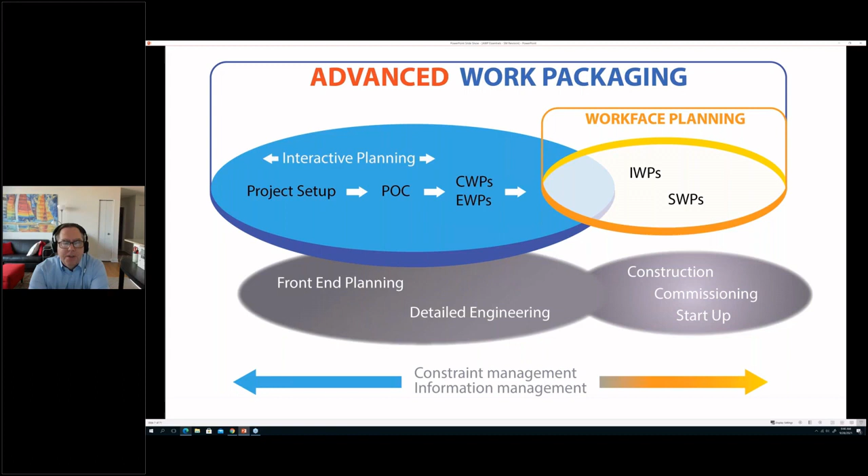Now, across all of this, we focus on having good information management so that information is shared across all the players. And we have good constraint management to make sure that we're resolving constraints before they become a problem and impede progress in the field. So if you're coming from lean and you're familiar with the last planner concept or constraint management, that is fully embraced in the AWP principles, although we don't always use the same words to describe it as lean does.

So with that, that's a very high level overview of what AWP is about. It's not about reinventing how we do projects per se, but it is about putting in place a structure to cement good practices with innovations around work packages as the primary deliverables, which is an innovation in how the normal project accomplishes work. So with that, let me turn that over to my colleagues and have them talk about what AWP means to them.

So Jamie Gerbrecht. Bill, let's go back to the previous page just for a minute, one more, just to that introductory page. Sure.

So, for me, as Dr. O'Brien has shared in the past, to have AWP is to have a wellness program for projects. I can recall about 6 years ago when I first visited a particular project site where the workface planning portion of AWP was being well applied. And what was so impressive was not just how well things were going in terms of safety, productivity, cost, schedule, predictability, and quality, but also how positive and energetic the site atmosphere was for this team.

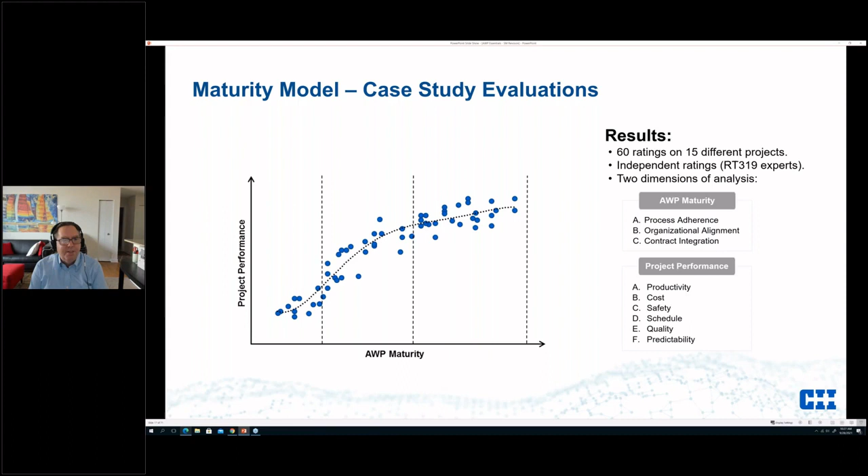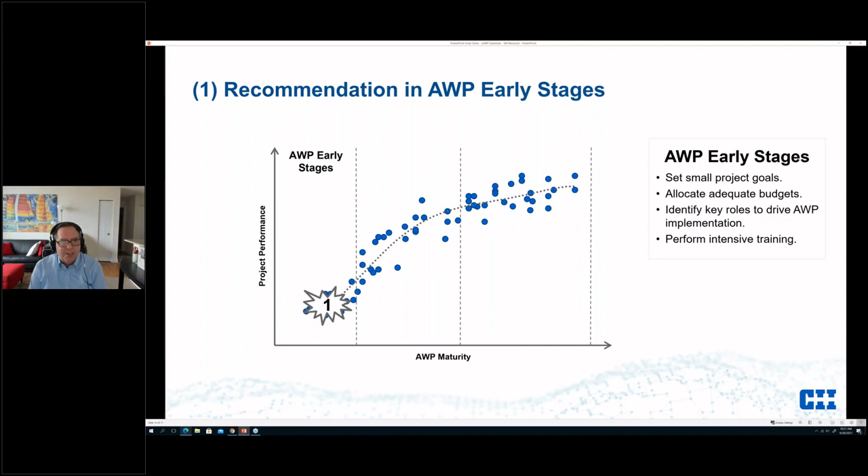So what do we see when you're getting started? Oftentimes you're not doing full AWP, you're doing just workface planning. You're getting initial champions to learn and get started, and you're seeing maybe a 10% improvement in productivity. We can see that here of around 10% in productivity, projects coming in on budget, safety is improved, schedule, predictability, and quality, little small improvements.

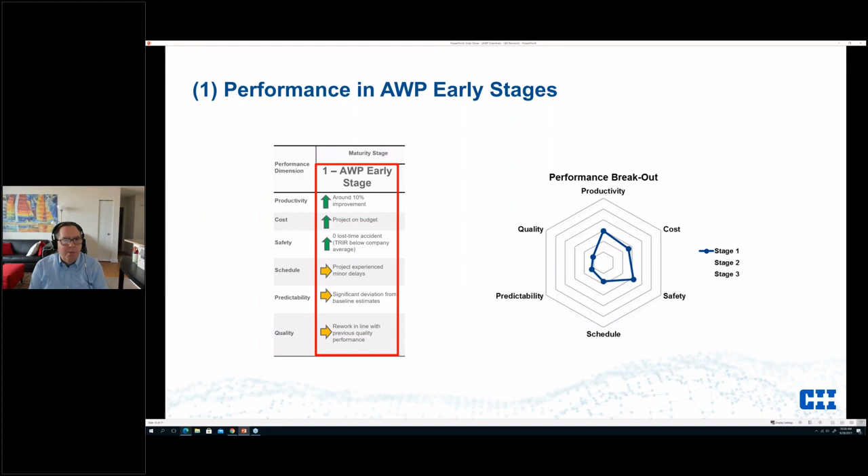Now, what happens when people get past their first implementation and they do a workface planning, which is let's just improve construction, they quickly realize there's only so much they can do because the supply chains are a mess. Engineering is not delivered in a timely manner for procurements to happen timely, and so on. And so when they move from workface planning to full AWP, that's where you get to be highly effective. This is where you're getting early engagement and stakeholder alignment early. This is where you get the big wins.

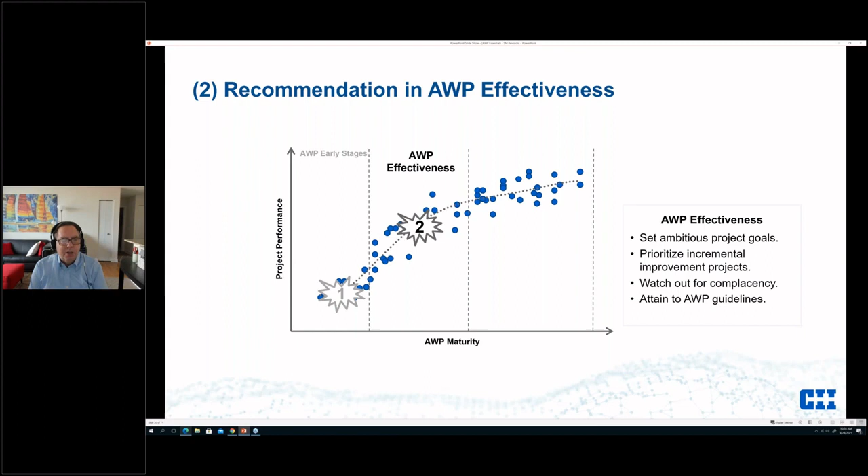And you're getting about 25% improvement over base. That's bringing in the total installed cost about 10% below estimates. Safety and schedule get up, and then predictability and quality also improve. And we've seen this repeated from projects that have contributed since this data was established a few years ago. And basically, once you bring in the front end planning well and get everybody aligned, that's when you see the big wins.

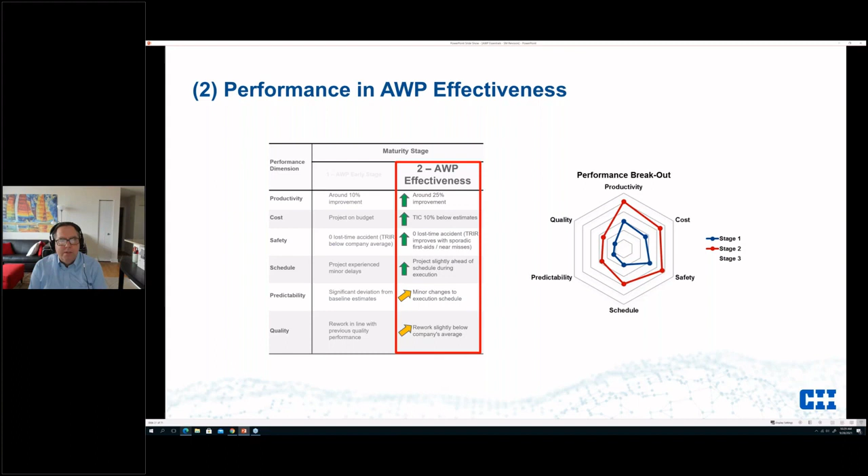And then when that becomes mature, you really cement the gains. You don't have tremendous improvements, but you do see some better predictability and better quality as kind of the big jumps at this point. And you're maintaining the benefits elsewhere in terms of safety, productivity, cost, and schedule.

So this has been repeated multiple times now across projects. We've seen productivity improvements about 25%, and that appears to be very achievable when you do a workface planning implementation on site, which you could say is very much equivalent to a Last Planner type of constraint management, and you align the front end with the back end with full AWP.

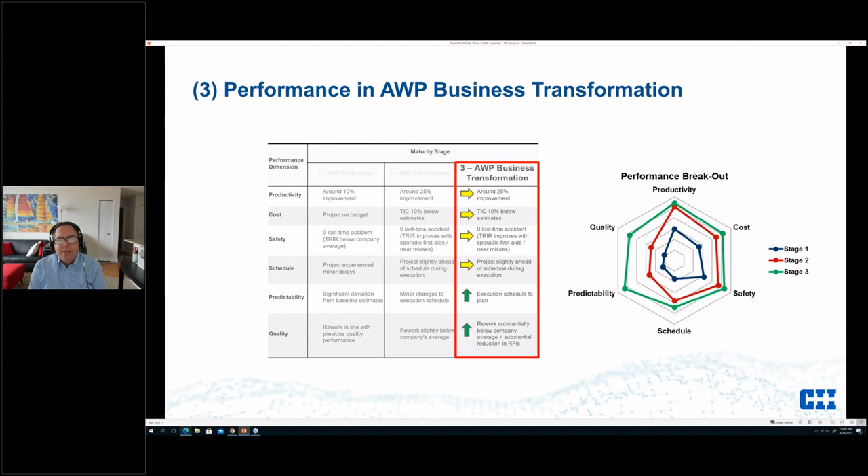And so this is the level we get to, and sometimes we'll see people saying, I want all the benefits in my first implementation. Well, that may not be achievable, but we do think early implementations do have some significant benefit, and as you get better at it, you cement and mature and keep those benefits across all your projects. And so what we see is a lot of organizations now are trying to make AWP their baseline for every project. It's not just the one-offs. As they get maturity, well, we want every project to be this way, and it becomes the way of working.

So how does AWP work? Let me click through this pretty quickly, and then Bob, we can assess if that makes sense for a break.

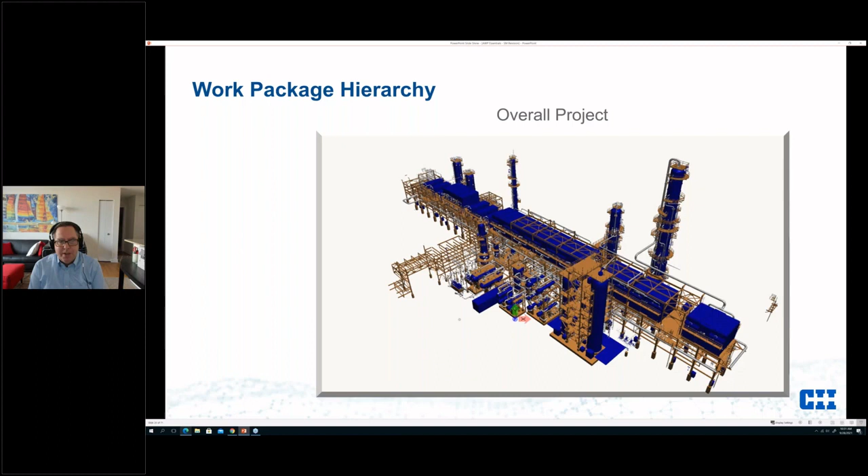You have an overall project. You're going to break that into large chunks of work called construction work areas. It could be units, it could be areas. This is an optional construct. On a big plant or a big project, you might want construction work areas, and on a smaller one, you might not need it.

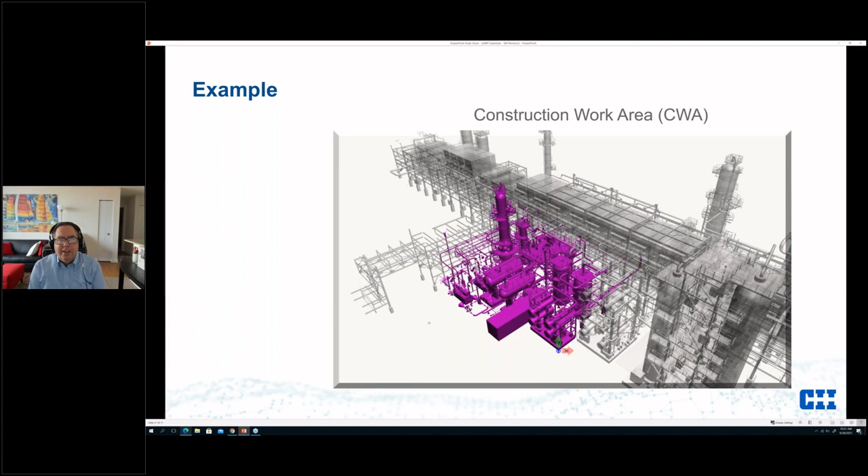But the construction work area is an area, and that is broken then into CWPs and EWPs, and then we have templates for them in our documentation. The key thing here is not the template, but the CWP and EWP are the official ways we think about breaking a project into its pieces and how we transfer information. And that is area and discipline based.

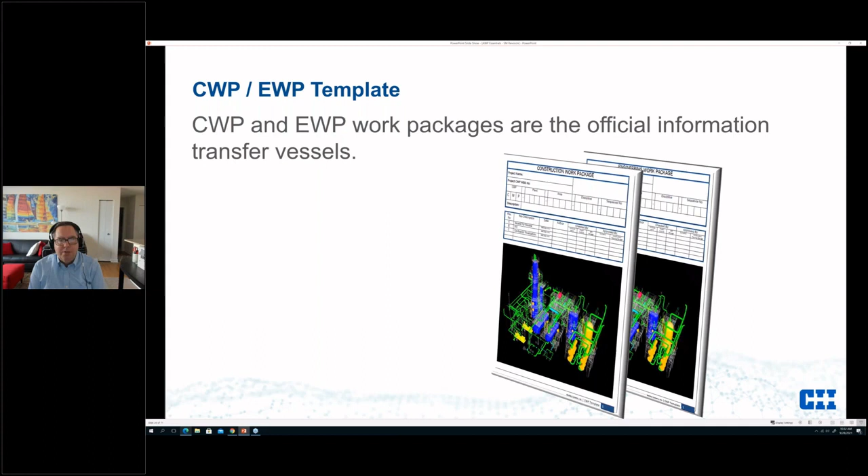And so that's different than saying, here's a complete set of plans for the structure. It's no, this is the complete set of plans for this construction work package in this area and per discipline, which is composed of one or more EWPs. So here is a construction work package within that larger CWA. It's still a big body of work. It's some complex piping, and in this case, it's a piping discipline only. So CWPs are per discipline.

You would have a structural discipline. You'd have foundations discipline CWPs, all within the CWA. Notice the tie-in point called out there. That may not be a functional valve in the final plant, but we're adding something there to allow the CWP to be complete and tested amongst its constituent parts during construction.

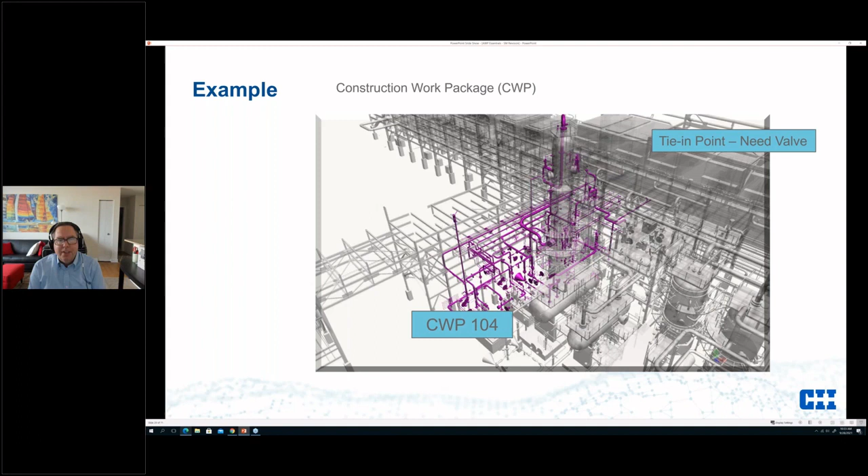So engineering work packages are aligned with the physical boundaries of a CWP, and here in this case we're showing the CWP is broken into two EWPs. John Fish mentioned that in his work it's often one-to-one. Many people will do that for execution, but it doesn't necessarily need to be that way. The hierarchy is one CWP contains one or more EWPs. And that alignment first has to be within the boundaries.

And the reason we want to make sure those EWPs sit within the boundary of a CWP is because we have a plan of how we're going to procure and build this CWP in the field. And we want to get the complete set of EWP information, which would include all the pipes and the sizing and the valves, but also the hangers and all the detail work that would come later. Typically, we want to get that done and make sure it's delivered in a timely manner.

So what does that mean? Well, the process engineer for this pipe is still designing by system. So they're going to do the complete system design for the pipe. But when they think about prioritizing the detailing, they're going to deliver that by area or within the CWP. So that will change some of the detail work that the engineer does and the sequence for that.

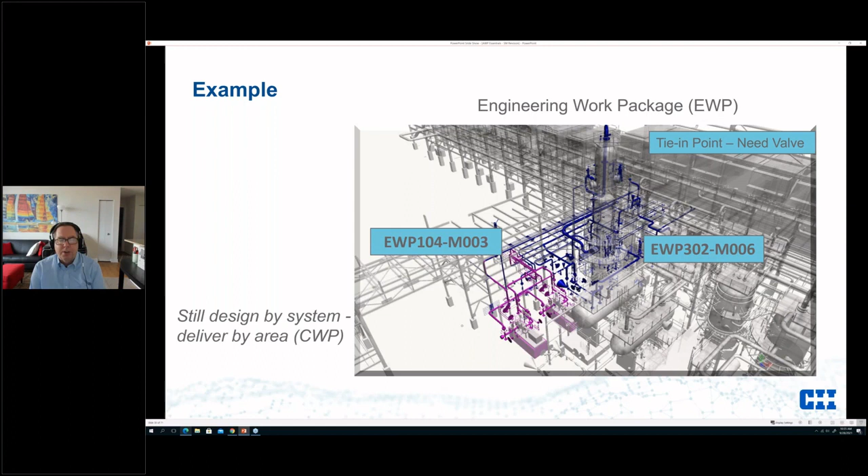So once we have the CWP informationally complete in terms of its engineering work packages, all the design is complete, and we've gone out and procured it, we can break things into an installation work package. And that's this IWP here, which is roughly a week's worth of work for a crew. Rules of thumb, 500 to 1,000 hours. It's really what makes sense.

It needs to be something discrete and manageable that you can process constraints on, make sure all the parts are available, all the equipment's available, safety checks have been done, etc. And then you do your installation work pack to put this together. The crew and the foreman still have great choice within this IWP of how they're going to assemble within that. So we're not removing all responsibility from the foreman.

But what we are doing is having a workface planner that helps assemble these IWPs. And best practice is to keep the IWP definition virtual for as long as you can and only release physical paper to the field as late as possible so that you can move things around within IWPs within the CWP. If a valve is missing, we'll move that out to another IWP, but make sure that you're releasing a logical sequence of work to the field for the crew to be productive in the field for this time.

So there was a question, I saw it popped up previously, about what about test packages? Well, you could also have an IWP for a test pack. What you do want to do is once you're finished a set of IWPs and it's logically correct and complete, and you've done the hydro testing on the EWP, in this case for piping, or whatever other limited commissioning, at some point you're going to move to an SWP, which is a system work package, when you look at energization and other aspects of commissioning to final turnover to the building.

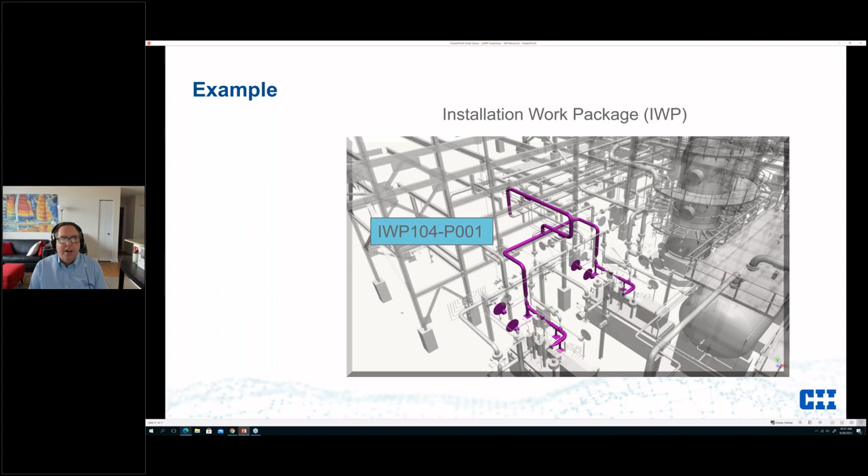So some people will use the term test work packs. Many will use that as an addition to IWP. That was one of the questions I saw there. All right, so how does this work for a non-process plant? Well, a couple of years ago, a team said, okay, how might this work for a location where there was a venue, commercial Jersey City Shores on the Hudson? There was a meeting there. So let's talk about how we break this into an AWP approach.

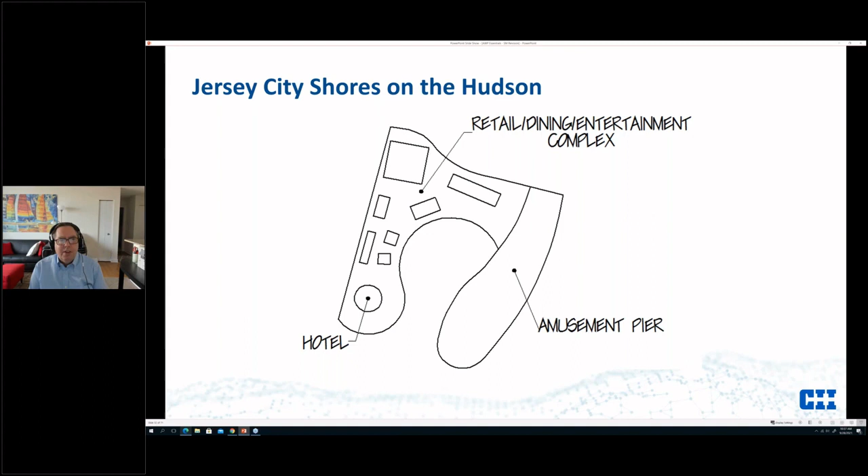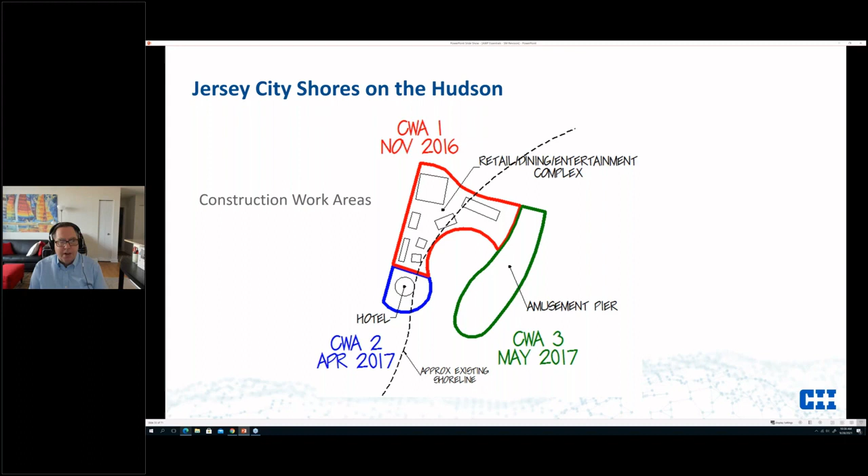So here's this retail complex, there's an amusement pier, there's a hotel. Let's break it into some construction work areas, to be completed in 2016 through 2017. Do the retail dining complex first, the hotel to follow, and the pier to follow that. Okay, so these are the CWAs. Now within a CWA, you will have multiple construction work packages for each discipline. You might have one for underground piling, that's the full CWA. You might break your foundations into smaller chunks within the CWA, in this case 4, and you'll have framing, 4 CWPs just for building framing within the CWA.

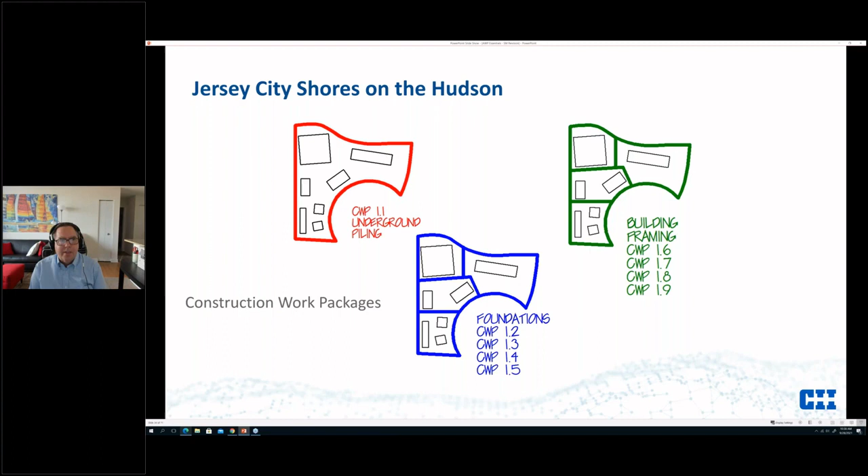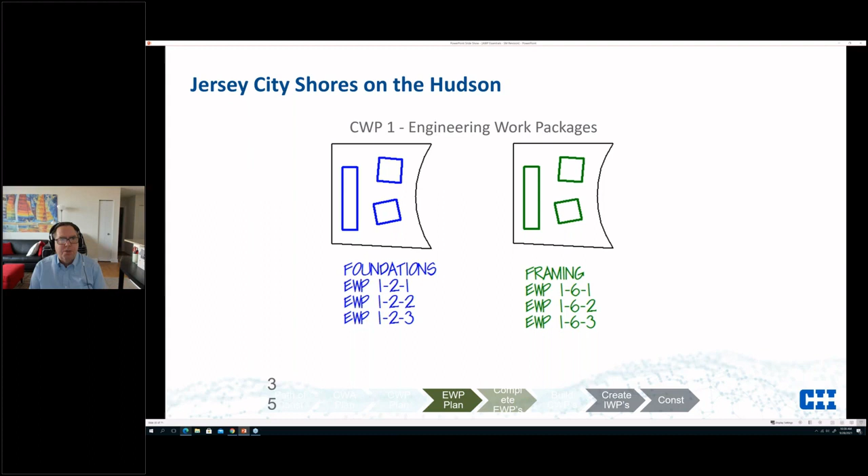Each CWP can have one or more work packages. So for foundations, you might have 3 EWPs that talk about foundations for CWP1, similarly for framing. And then to think about how this all comes together, you can have some CWPs and EWPs within those CWPs. The key thought there is you're keeping things together per discipline, so that also directly supports procurement.

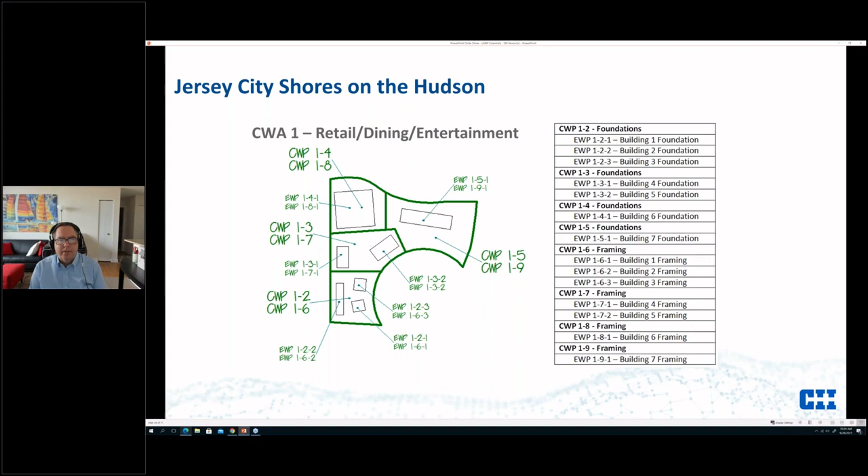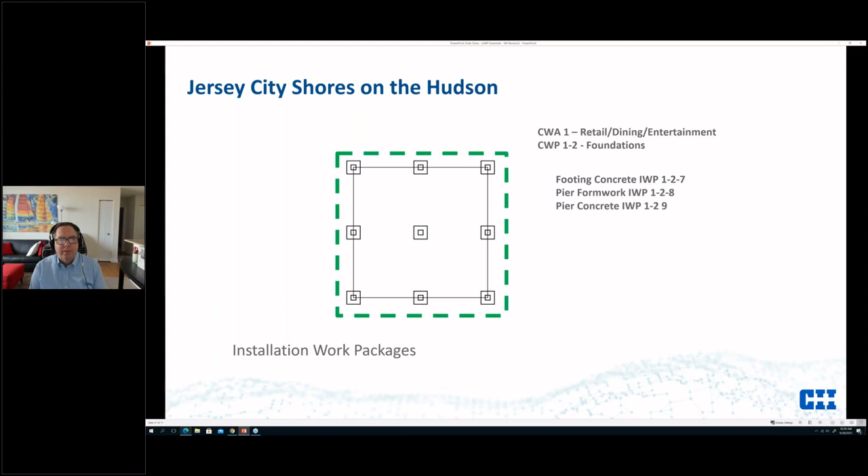And then finally, once all the design is complete and you're ready to release to the field, you can have a series of IWPs. You might have a couple for footing and formwork. You might have some for reinforcement. You may have another one for the concrete and formwork, and so on. And then they would all come together in alignment like this, where you have a set of CWPs. A CWP can contain one or more EWPs as makes sense. And then once the CWP is informationally complete with design information, that CWP is broken out into multiple IWPs releasing work into the field.

Rule of thumb in industrial projects, about a week's worth of work for the crew, but use your judgment. The key thing, it needs to be small enough to be trackable and constraint managed against materials and their availability, and resources, but not too small to get into hourly planning. That would be a different thing entirely. Occasionally you might need a project that gets down to that level, but that would be very specific.

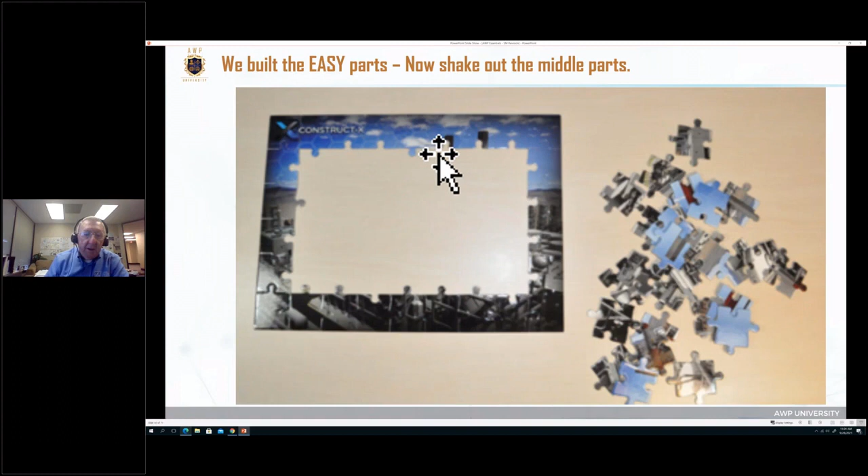So now we got the border pretty well done. Now we got the middle, and this is where life gets difficult. And by the way, I've got a Cutty Sark ship model, and I'm still struggling with these middle pieces. It's very, very difficult. But anyway, this is the hard part right here. You're going to build pretty much what's available. So there's a lot of rework. There's a lot of guessing here, trial and error, see what fits, what doesn't fit. I'm missing this, I'm missing that, and so forth.

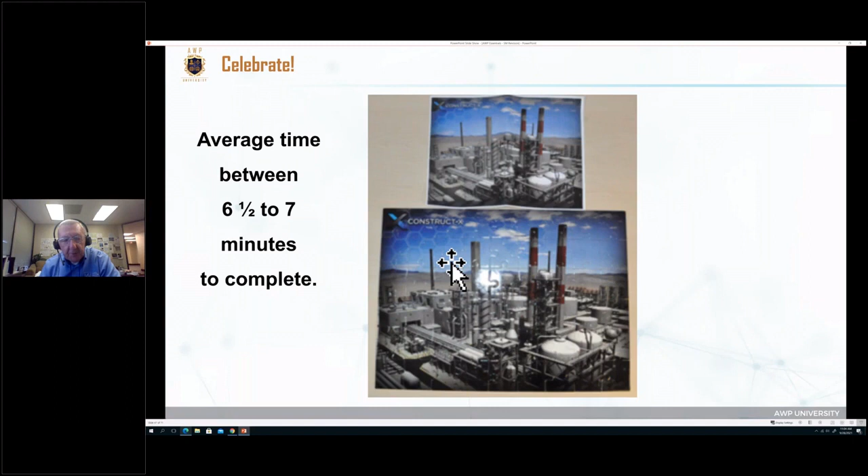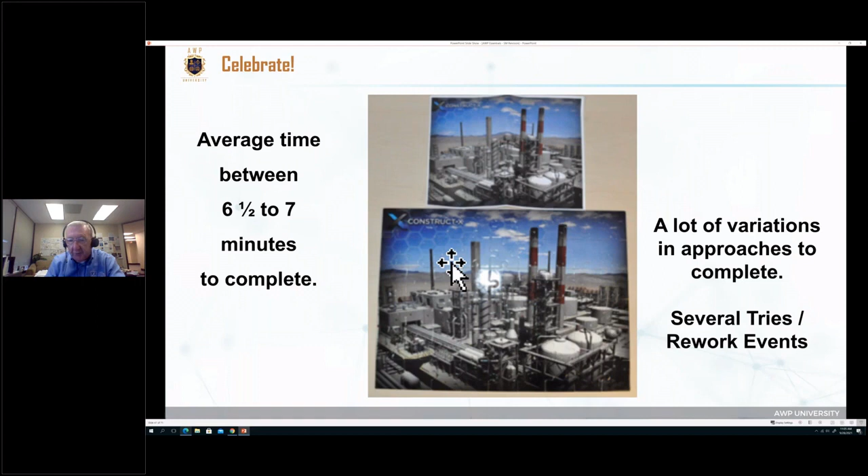So in the AWP principle, we look at a sequential flow of information and materials to the site. Here's where your field planner is going to prepare those constraint-free installation work packages that we talked about. And we're going to bag and tag all the materials. Not only that, but the field planner is going to make easy to read assembly or installation instructions, not just drawings, but he's going to take model shots in many cases and annotate those model shots as step 1 or piece 2 or piece 34 or spool 57. So he's going to give you directional arrows, number the pieces, and give you really clear instructions on how to install that work package.

And it's going to be the same way with our puzzle. So we got all these little different pieces. We're going to follow that path of construction we talked about. Notice we're not going to start building the corners. Doing the easy stuff doesn't necessarily give you a competitive advantage. It looks good, but it doesn't necessarily mean you're going to finish any quicker. In some cases, it can even hurt you.

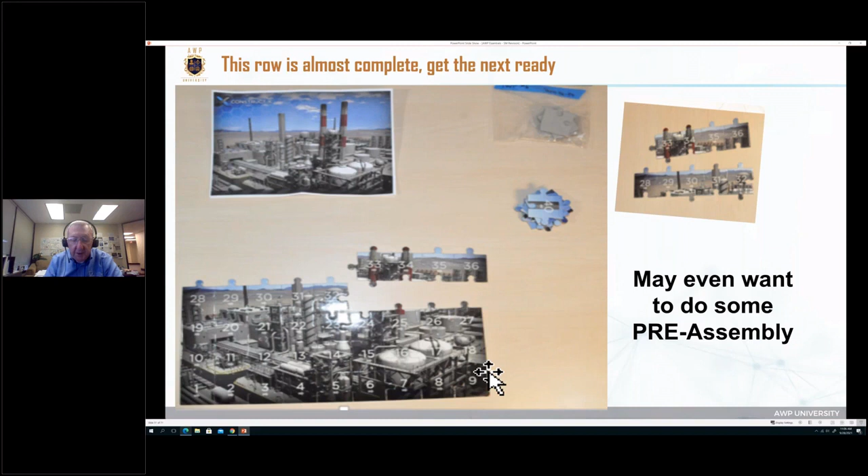So we're going to start at the bottom left and work to the right. Notice all these pieces are numbered. The bottom row was bagged and tagged and the pieces are numbered. You can't miss here. Then the next row, following the numbers again, 10, 11, 12, and fit those right on top of the others. Now, we may even want to do a little bit of pre-assembly, put a few pieces together and then move them in as a chunk, and that's okay. You're going to do the same thing at the job site. Little pre-assembly, might get a jump on things, make it easier to get things to fit together.

So anyway, when we finish, notice 1, 2, 3, every piece is numbered with explicit instructions. The average time is 2 to 3 minutes versus that 6 to 7 minutes we talked about. And the main thing is almost zero rework using the AWP constraint-free methodology.

And what I want to point out is that rework is unplanned work. Unplanned work is not scheduled. The more rework you have, the more impact you're going to have on that schedule. Each time you have rework, you're going to build up that negative schedule impact, negative productivity, and that's where the killer is at the job site.

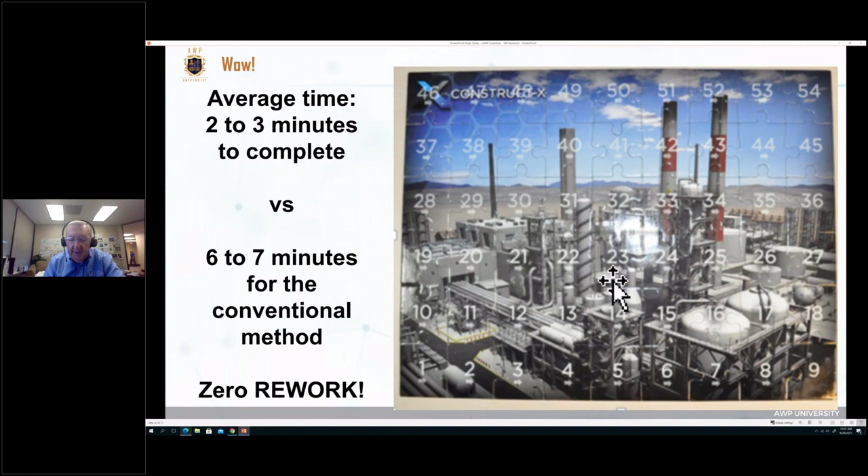So the A in AWP, it's all about the planning, guys. I mean, come on. You're going to do all that preparation planning up front so that the guy in the field, the craft, you're trying to make that craft productive. That's where we're going to spend our money. Rework and misfits and looking for stuff and waiting for stuff. That's where your money goes at the job site.

So again, that construction defines that path of construction. You're going to align the stakeholders to support it. You're going to have that structured process, the consistent education. Your planners are going to do all the major planning for the foreman, rounding up all those materials, rounding up all that information, and they're actually going to number those pieces and build explicit instructions so that you can prepare that constraint-free work package for the craft. Making the craft productive is what it's all about.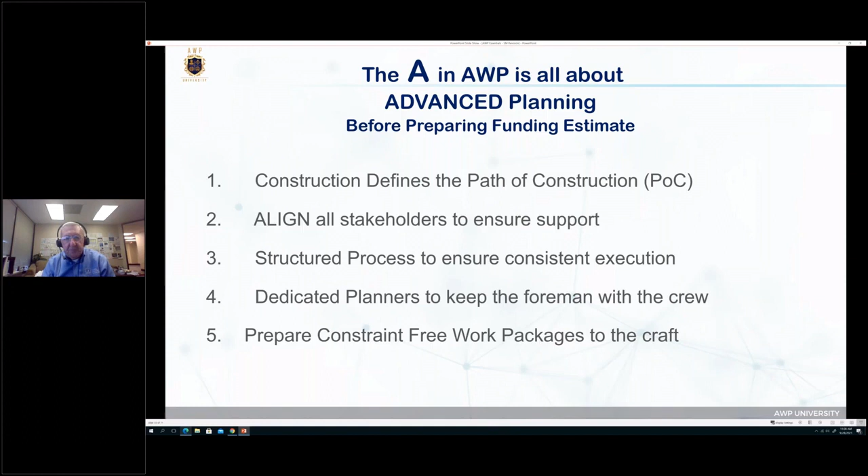So thanks again to ConstructX for sharing the puzzle game with us. I think it's a beautiful illustration of the two different concepts.

So now I'm going to turn it over to Bill. Do I give it back to you or Jamie? I think you can just keep going if you guys are still on deck. I think Jamie's the next slide. It's not going forward for me for some reason. Jamie, take over. Very good.

Okay, so, Bill showed earlier the research results indicating what the expectations could be around improvement across performance dimensions when a project implements AWP. Well, some 5 to 6 years after that main body of research from CII's Research Team 272 published their implementation resource, we went to a cross-section of owners and EPC companies to ask for their feedback on actual experience with implementing AWP fundamentals relative to what we were seeing in improvement across these performance dimensions.

And I just want to share some of this with you in terms of now this is actual data, not just from the case studies that supported the research results, but projects that picked up on what AWP was about as a result of that research, started implementing, and how things turned out.

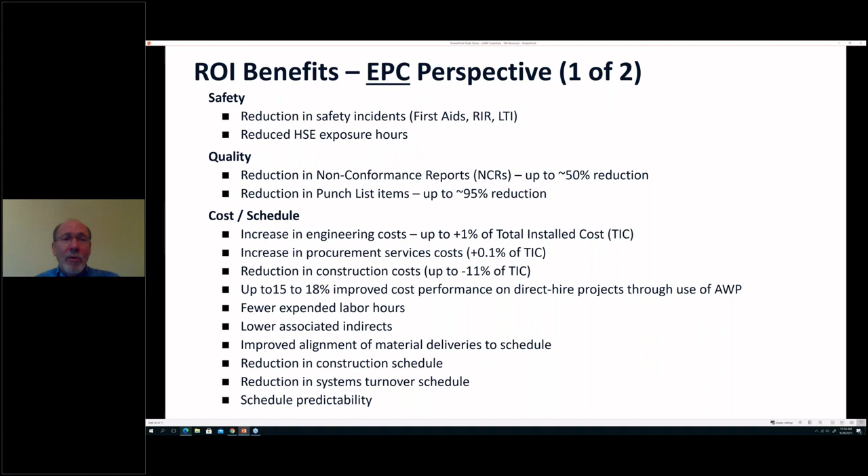So you're offsetting what may be minor increases in engineering and procurement associated with the discipline that you're applying in AWP. The fourth point, up to 15 to 18% improved cost performance on direct hire projects through use of AWP. And you could go on and on down this list of fewer labor hours, fewer associated indirects, and so forth. And now let's go to the last page on this section here.

And then some EPCs are looking at this as a positive step in a direction of showing owners how well they could execute efficiently using AWP, which has the potential to impact the future work with the owners.

So this is intended to show more of an up-to-date view of just what the actual experience has been, shared by owners and by EPCs, and it's very much in line with what the expectations were that the research team that Bill worked with within CII put together, some 5 to 6 years later in publication, forecasting what sort of improvements AWP should be able to bring. So that's good for now.

Thank you. John? Thanks, Jamie. Okay, I assume I've got control of this. It doesn't seem to be going to the next slide. Try it again. There we go.

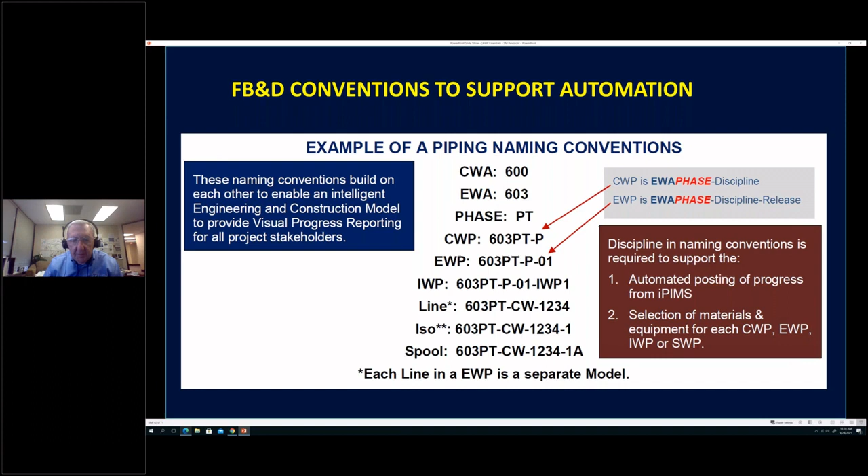I do have trouble with these slides. Okay, whoops, went down again too far.

Go back one. All right, these are the discipline standards. These are what we call the model naming conventions that our disciplines came up with. And I'm not going to go into detail on this, but it's very much like those conventions that I established. Our disciplines have come up with how they name all of their models and how they put them all together so that we can sort and select data out of there.

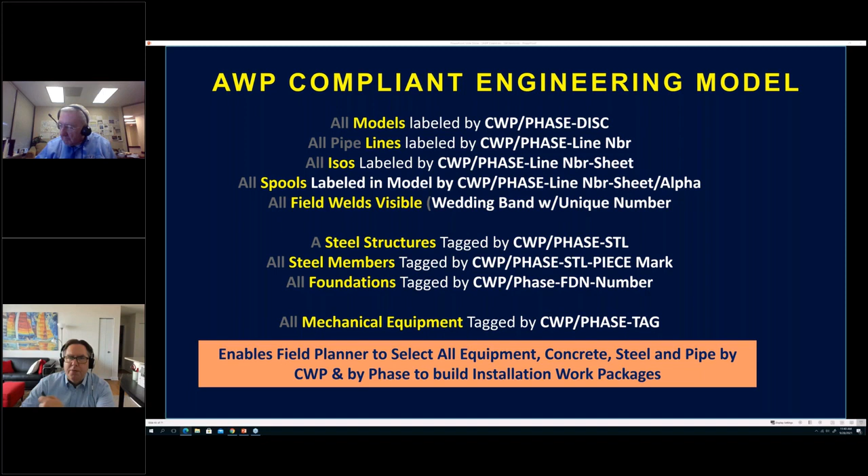The organizations that have adopted that as part of their corporate execution strategy are finding success. It's hard to get started, but once you get there, they're finding it's the everyday thing. And that, to me, is really where AWP has things to offer to the lean community: the currency of work packages and the process discipline of doing it every project, in a repeatable and reliable way. So from here, we were having a couple of golden nuggets from Jamie, and then I think we were going to go on to some Q&A. So Jamie?